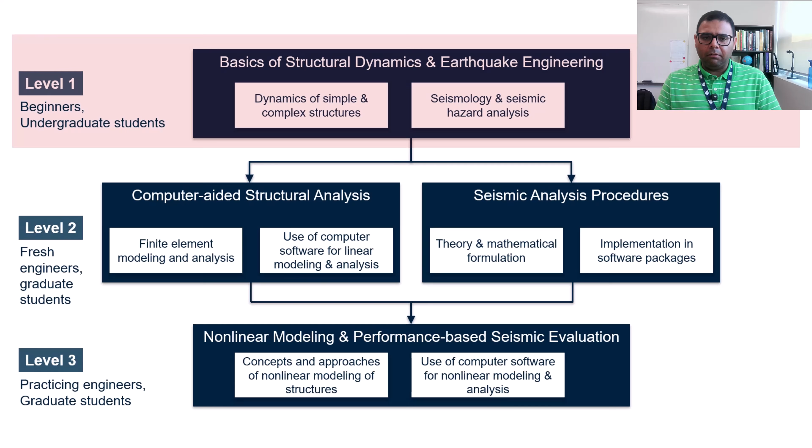In level 2, this classification focuses on computer-aided structural analysis and the basic theory of seismic analysis procedures. In level 3, I classify the playlists or content associated with inelastic modeling and nonlinear analysis, coupled with computer-aided seismic analysis techniques. So if we talk about level 1 first, I would recommend watching these three playlists first.

All three are comprehensive, detailed video lecture series focusing on fundamental concepts. I have a series on structural dynamics, 32 hours long - it is actually one undergraduate course which I have taught. Similarly, a course on structural dynamics, and then also a course on basic seismology and seismic hazard analysis.

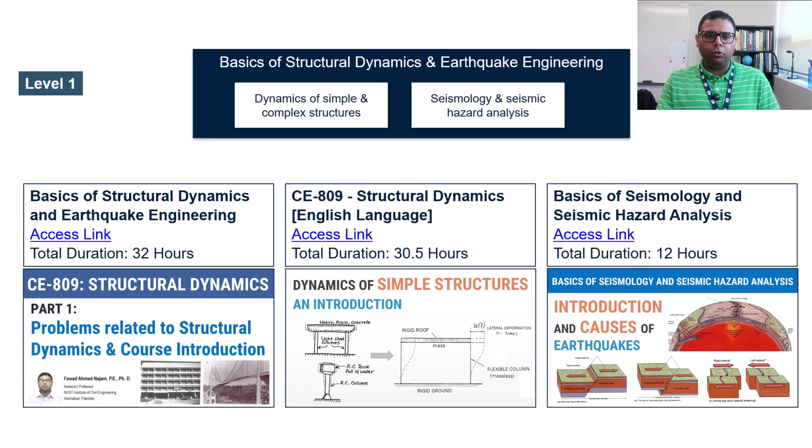This would be my recommendation if you are at level 1, to start that process of learning through my YouTube channel. In level 2, I focus on computer aided analysis and seismic analysis procedures.

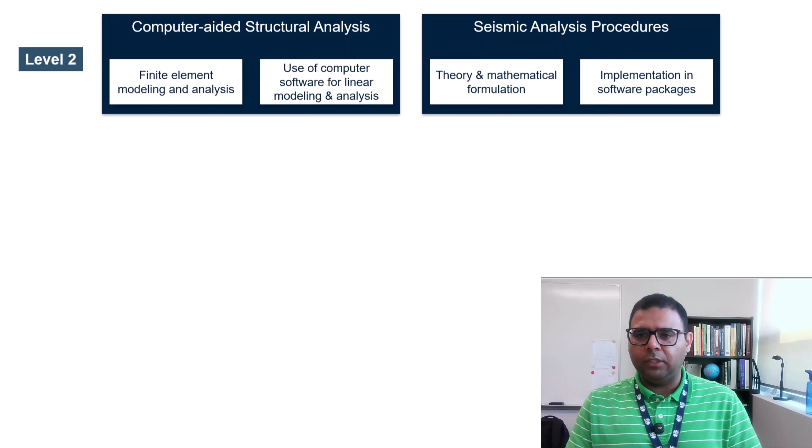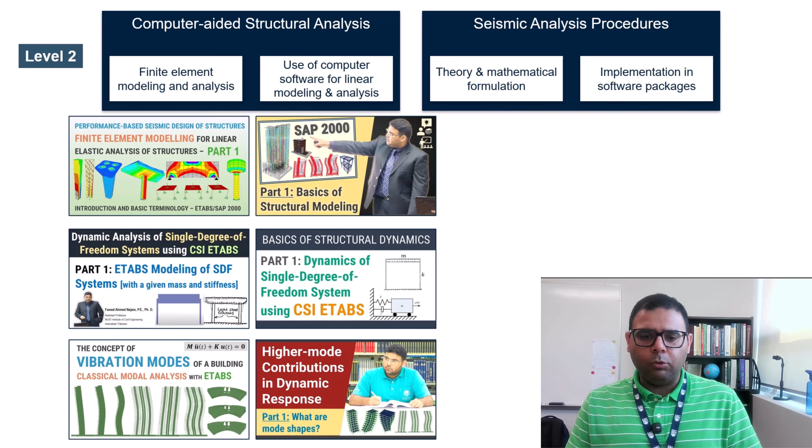In this level, if you check the content available, you would see I have 6 detailed playlists focusing on computer aided analysis, different software techniques, mostly using CSI ETABS or CSI SAP 2000. Then I have 3 playlists towards seismic analysis procedures, explained in that particular order.

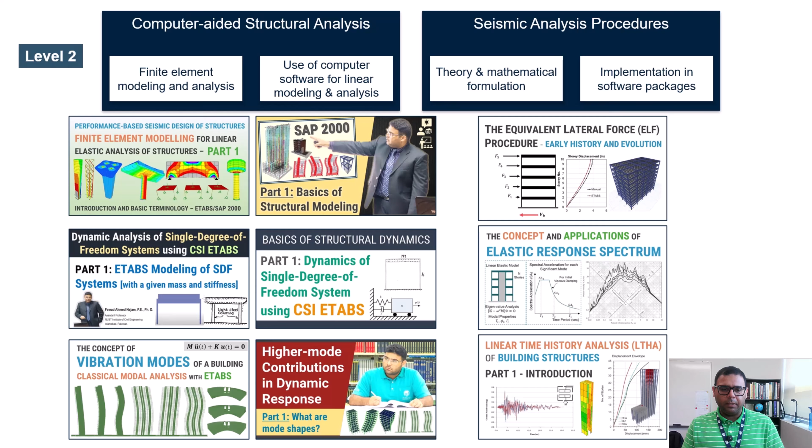Going into details, those 6 playlists related to finite element modeling and computer aided structural analysis - you can see I have a detailed video lecture series, 17 hours long, on basic finite element modeling. I also have a series of miscellaneous topics covering several aspects of CSI ETABS and SAP 2000.

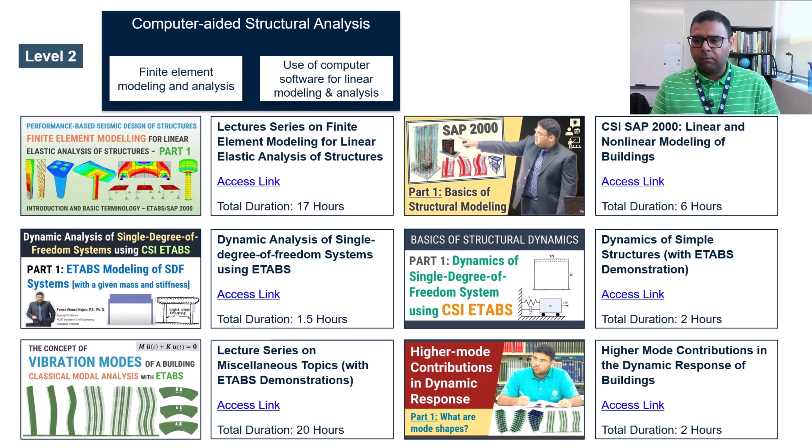For seismic analysis procedures, after developing basic proficiency in computer aided analysis, you can go to these three playlists in order: starting with the basic equivalent static analysis procedure, then response spectrum, and finally the linear response history analysis procedure. These are 5 or 6 hour long series each, and you can watch them in this particular order.

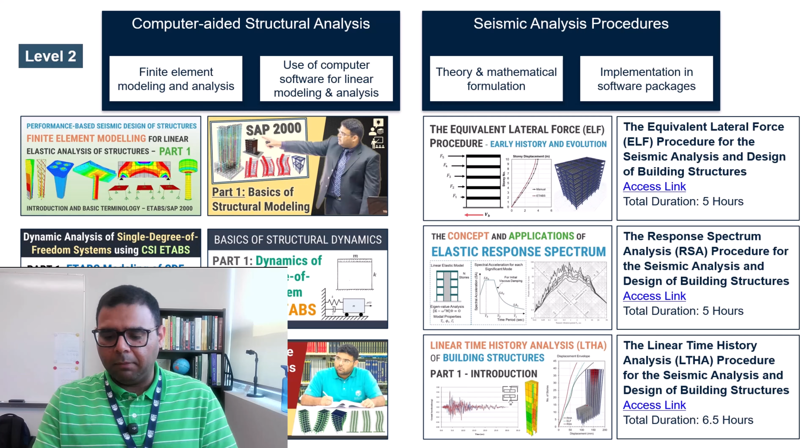It also has a separate performance-based seismic design course, 27.2 hours long - 2 detailed playlists available in that domain. These playlists also have several hands-on training sessions on CSI ETABS and SAP 2000.

I also have a detailed playlist on the use of Perform 3D - it is a member-only playlist, available only for members of my YouTube channel. For pushover analysis, I have 2 separate playlists that are comprehensive enough to develop basic proficiency, and they also contain hands-on training and demonstrations using CSI ETABS.

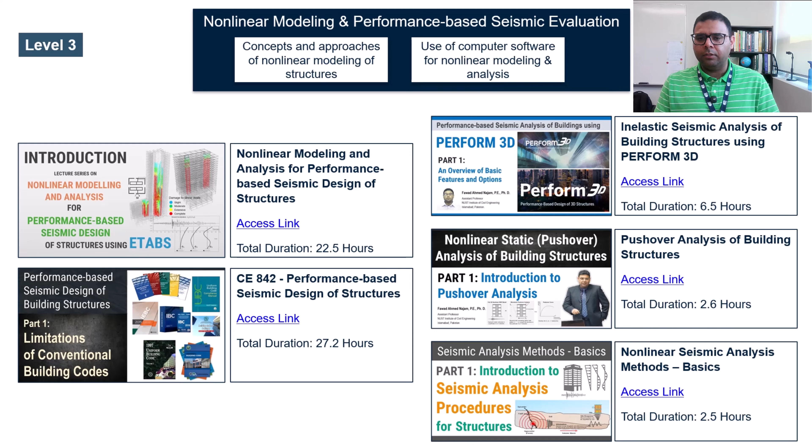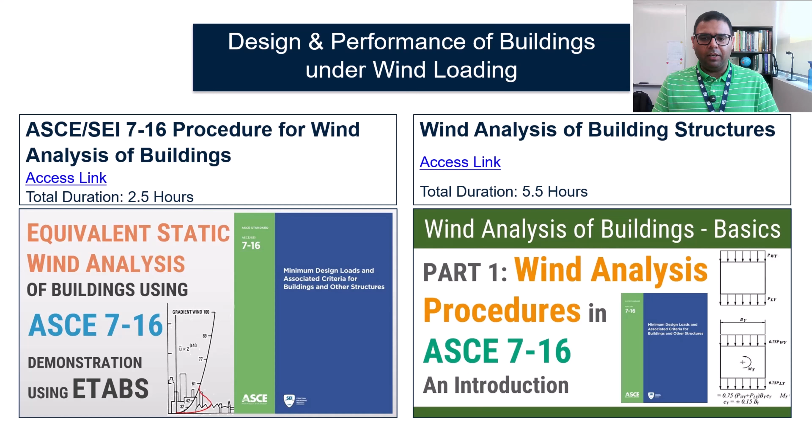This was an overview of all the content available on this channel. Finally, I wish and hope that this is a useful addition to your skill set and you are able to apply and implement some of the concepts you can develop through this learning resource.